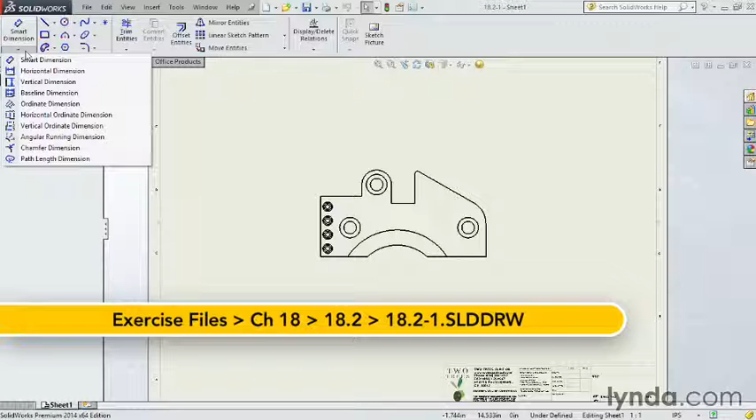This movie will continue on with dimensioning by adding the ordinate and running dimensioning styles. To get started, let's go up here to Smart Dimension, and directly below that, click on the drop-down arrow, and we're going to choose the horizontal ordinate dimension.

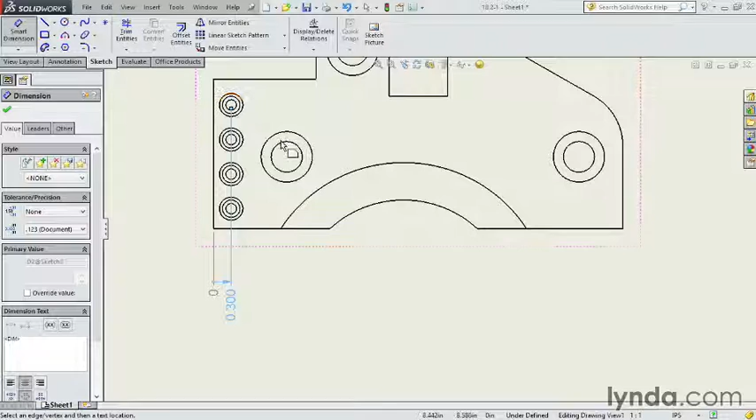To use this dimensioning scheme, we choose what is the baseline of the part. In this case, I'm going to choose this edge here, and as I click on that, I'm going to drag down this little 0 mark right below the part. Now, any item I click on in the part will automatically add to this dimension. So if I click on this first hole here, it adds a dimension. If I click on the second hole, it adds the dimension. This line, this hole, this line, this line, this hole, the end of the part.

Really quick way to dimension. It's a great way to add a lot of dimensions quickly, and it's very compact. It only uses one line across the bottom of the part versus stacking it down the part.

I can do the exact same thing going up as well, so I can say a vertical ordinate. Again, choose the bottom of the part as my baseline, drag out the 0 point, and then start dimensioning each one of these individual holes across the part.

If you need to go back and add something else, no problem. Click on a line and it automatically adds it in. Go up here to the top. You can add a line here. You can add lines all the way across your part.

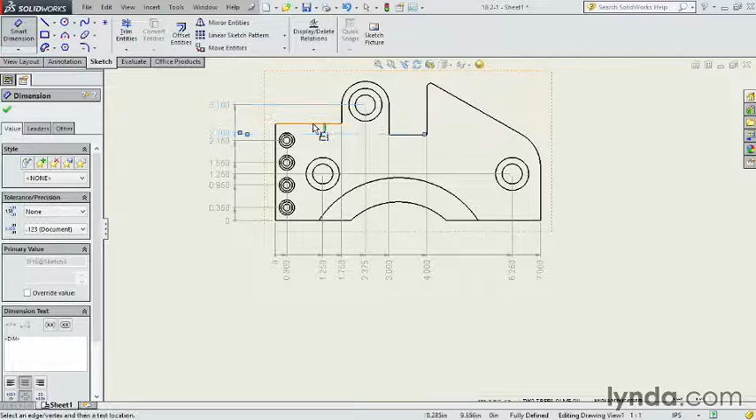Very easy. And if you need to add something later, you can always go back to that ordinate dimension and add it by right-clicking on it and coming down to Add to Ordinate. That will automatically add it back in, just in case you forgot something.

A very quick way to add a lot of dimensions to a part. This is especially great for items like sheet metal that have a ton of holes and features all over the part, where typical dimensioning schemes like baseline or chain dimensioning would just make a total mess of the drawing.

This is a very clean and concise way to represent quite a few dimensions across a part. I also want to point out what's new in SOLIDWORKS 2014: the angular running dimension. So I'm going to go ahead and open up a new part.

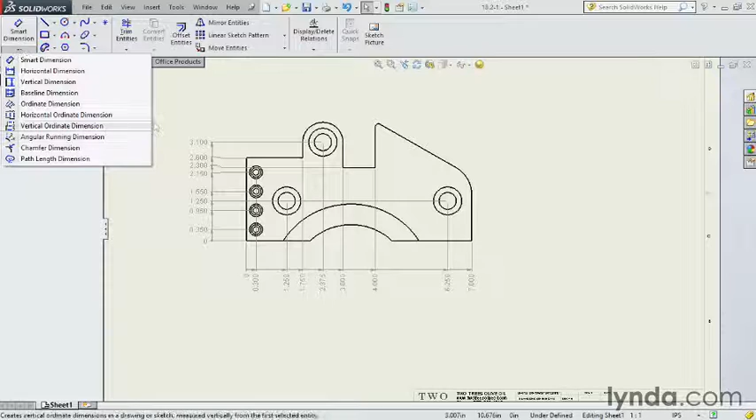You can see I have this part here with a bunch of little holes in a circular pattern. So I want to create a drawing for that. I'm going to come up to File, Make Drawing from Part, choose that same template we've been using, the TT one, and open that up. By default, it opens up and places a couple views on my drawing from that template we created.

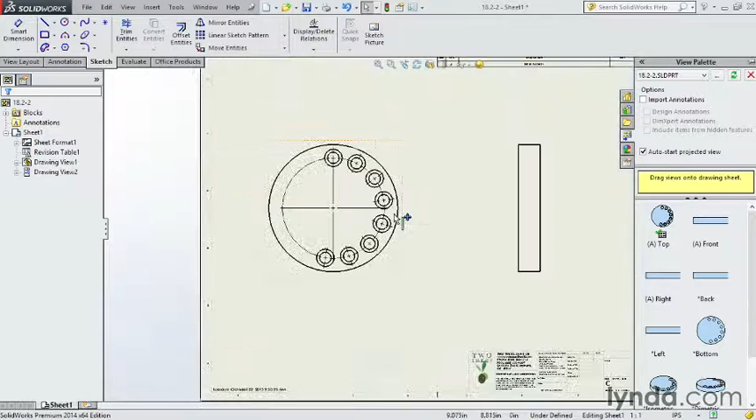Now I want to dimension where these holes are. Before, you'd have to make an individual dimension from each hole. Now what they've added is called an angular running dimension, so go ahead and choose that.

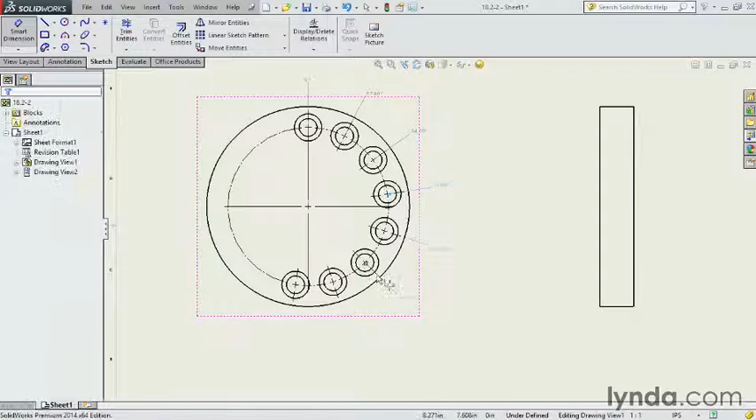My first option is where is the circle, or what we're going to use to make this go around, so click on this outside edge. Notice as I move my cursor, it snaps to different angles, so I can snap to 0 over here or 0 up here, wherever I want to place that 0 mark. In this case, I'm going to place it right above. Then any item I click on automatically adds that dimension, so I can quickly dimension the angle between all these different holes very quickly.

Pretty handy, it's a nice new feature for 2014. There are various tools to dimension parts, and depending on the conditions and the amount of dimensions, that will determine the best dimensioning scheme. There are no hard and fast rules about the best way. However, best practice would be to try to relate the information in the easiest and most direct way.